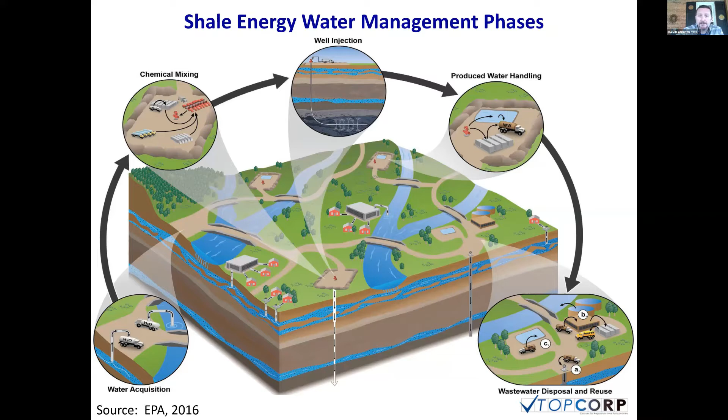This is another way of looking at the process as far as the water cycle goes. You bring in water, blend it with chemicals, inject it into the hydrocarbon-bearing formation, the shale, and then you get some percentage of the fluids you originally injected back. Initially we consider that to be flowback. Then as time goes on and the well is actually commercially producing oil, gas, or natural gas liquids, you get produced fluids along with it. It's really about how we manage those fluids in an environmentally sustainable manner that's also cost effective for the industry. So we'll explore some of those options.

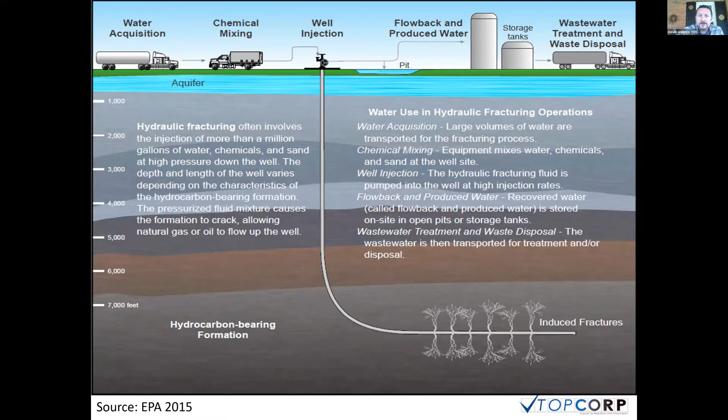So what are flowback versus produced fluids? I just kind of touched on that.

When we're fracturing a well, we know this is a fairly water intensive practice. Let's say we're going to use 10 million gallons of fracturing fluid to fracture a well with a lateral length of 5,000 feet. So we're injecting about 2 million gallons for every 1,000 feet, or about 2,000 gallons per foot on average into the shale.

As you inject those fluids during the fracturing process, which may take the course of a week or so, once you're completed with fracturing you begin to flow back the well, and a portion of those injected fluids return back. That volume varies. Here in the Marcellus in Pennsylvania, we'll typically get between 5 to 10% of the fluids we injected back out of the well initially.

As you begin to produce economic volumes of hydrocarbons, you continue to get fluids returning up the wellbore, collectively known as produced fluids. Sometimes those terms get used interchangeably, but some people do use a distinction: flowback is that initial surge of fluids before the well's actually producing, and produced fluids are what return as the well is actively producing hydrocarbons.

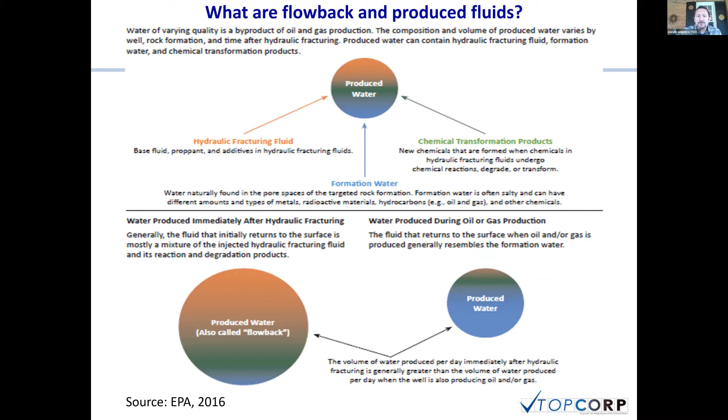This gives a sense of the relative costs of all the different phases. If we have a $10 million well, between the cost to drill it and fracture it, the completion fluids and the flowback—basically your water management—based on this study, is about 12%. So you could be looking at, on a $10 million well, in excess of $1 million in fluids management.

It's not an insignificant cost, so finding ways to do that as efficiently and cost effectively as possible will bring down the operational costs of developing shale energy. With the prices of oil and gas pretty depressed right now, any of those efficiencies are going to be important from an economic standpoint.

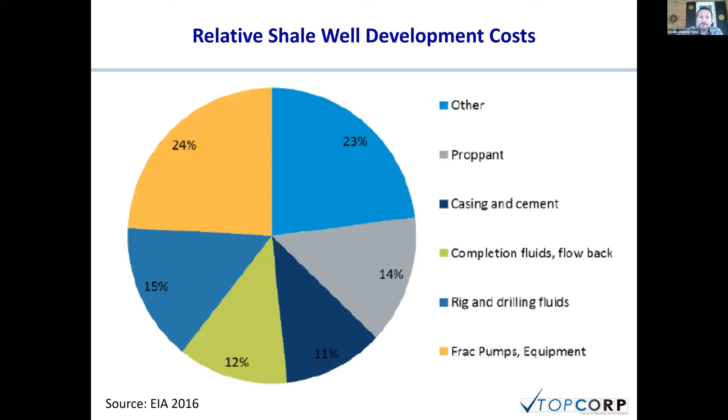We're talking to a pretty geographically dispersed audience here today, and different basins have different approaches. Here in the Marcellus, these numbers are a few years old, but a few years ago the average frac job was somewhere around 5 million gallons of fluids, most of which is surface water.

When you think about where the fluids are coming from overall, some might be groundwater—we do use some municipal sources that originate from groundwater. But we also recycle the flowback and produced fluids at a pretty high rate, and I'll get into the specifics on that a little bit later.

So you could have a variety of water sources here in Pennsylvania, but the majority of it's coming from surface water sources. Compare and contrast that to the Barnett Shale, where you're using a similar amount of water, but there's a lot more groundwater used in addition to the surface water, so that's about an even split, and then a little bit of recycling of flowback and produced fluids, but not so much.

So if we move to the other side of the equation here, in the Marcellus, the volume of return fluids is relatively low. We'll get maybe 5 to 10% of the fluids injected down into the shale back initially as flowback, and then we'll continue to return fluids over the course of the well's productive life. So over the course of, say, 10 years, we might get 30% or more of the fluids back, but the vast majority stay down in the shale, which is relatively dry and does have some absorptive capacity.

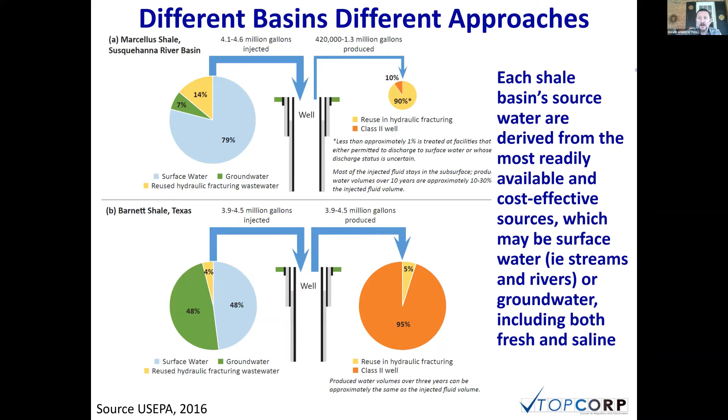So this is a slide that just kind of shows the relative gas production, and I apologize, these are kind of awkward units. We're looking at millions of cubic meters in gas production, oil production, and basically flowback and produced fluids. But the actual absolute numbers don't matter so much. What we're really interested in here is looking at the return fluids that you get back, and what that means for long-term management of those fluids.

So in this case, this goes up through 2016. In the Permian Basin, you get relatively low gas production, but you do get relatively high oil and liquids production. But then your return fluid volumes are relatively high, so you're getting a lot more return fluids per unit of hydrocarbon produced. Whereas, say, in the Marcellus, or even the Haynesville, some of these dry gas plays, you get pretty decent gas production, but not a lot of flowback or return fluids to manage.

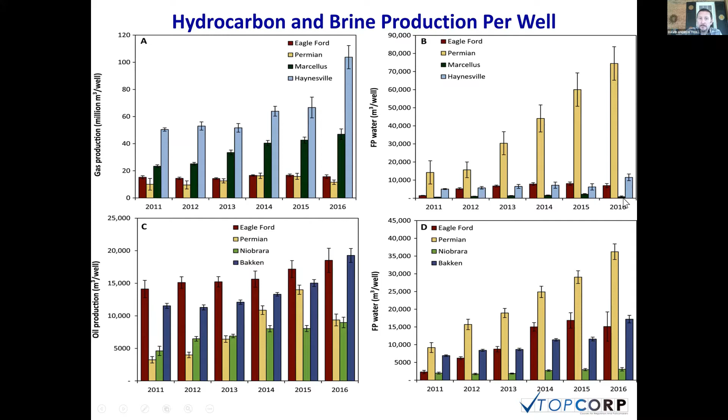This same study looks at it a little bit differently, looking at the ratio of your return fluids compared to your original water use. So for instance, if you're at 1 here, that means basically everything you're putting down the hole is coming back up. And if you're above 1, you're actually getting a surplus of fluids back, more than you actually put down there. So again, the Permian, based on this study, you can get on the order of 2, 3, 4 times more fluids than you injected down there in the first place. But say in the Marcellus, you're getting more like, as we said earlier, 20, 30, maybe 40% of the fluids over the life of a well.

So that was more on the gas side of it up in the upper chart, and down here in the bottom we're looking at the oil side of it, but basically the same trend there as well. So basically your water-wet shales tend to produce more flowback and produced fluids—they just don't have as much absorptive capacity. The hydrocarbons kind of repel the water back out, whereas the dry gas plays can absorb more of that water and actually draw it in with capillary forces.

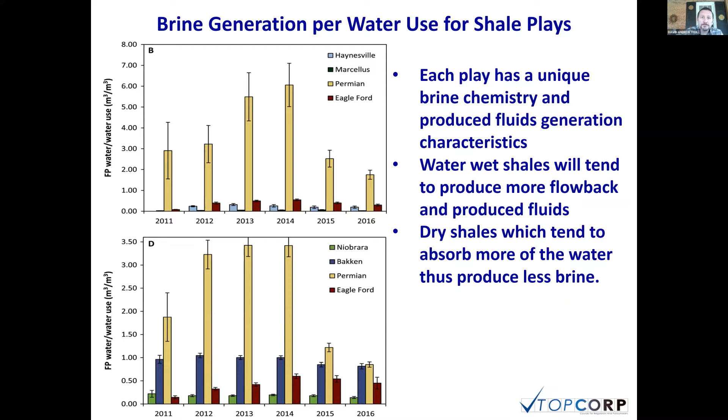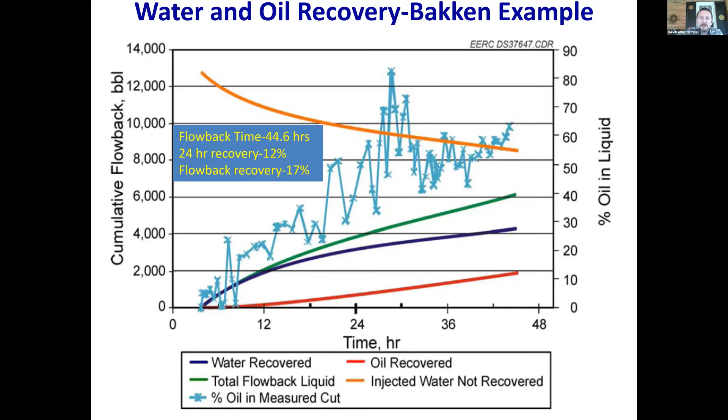So just an example of water and oil recovery from the Bakken. You've got cumulative flowback here on the left y-axis, and the percent oil cut, showing how much is oil versus water or brine. Over the course of time, you're getting a higher oil cut, going from 0 to somewhere between 60 and 70% oil in the liquid over just a couple days after flowback. When you think about how much fluid you injected versus how much you get back, in the first 24 hours you get about 12%. Overall during this 2-day period, they got about 17% of the fluids injected back as flowback, just to give you a relative sense of the volumes involved.

When we think about the quality of the flowback and produced fluids, this is an example across many of the western basins, both conventional and unconventional formations. Even from play to play or formation to formation, you can have quite a bit of variation in total dissolved solids, or TDS concentration. So if we look at the Williston Basin, you may see anywhere from 1,000 milligrams per liter to 300,000 plus milligrams per liter of TDS in the produced fluid.

Generally speaking, your early time flowback TDS concentrations are going to be low. The fluids have not been in the formation very long, so they don't have a chance to dissolve out salts and other metals down there. But over the course of time, as you get more water or fluid rock interaction, you're going to dissolve out more of the dissolved solids, and they'll come back up as produced fluid. So generally your TDS levels increase over time until they reach some sort of equilibrium.

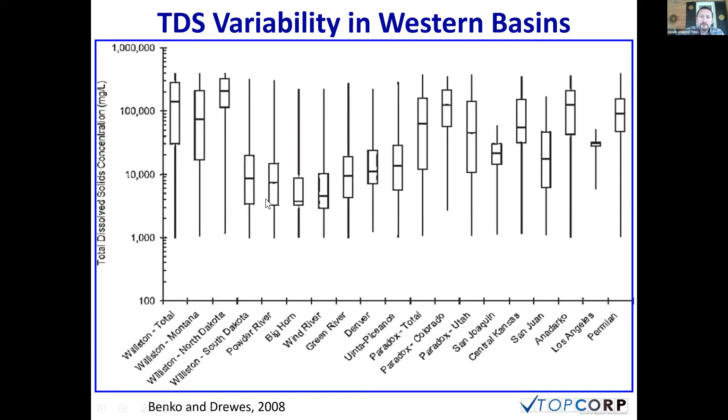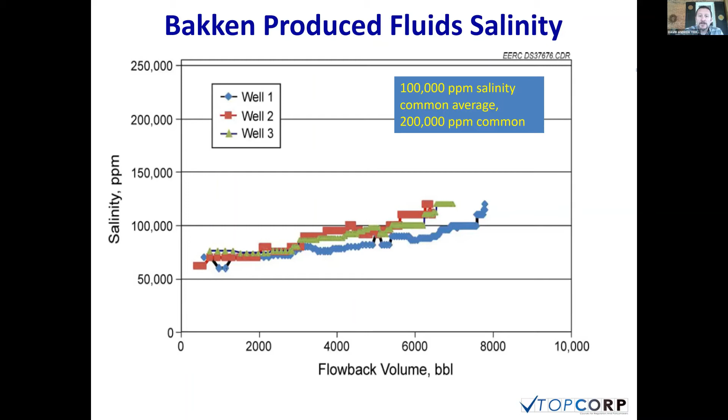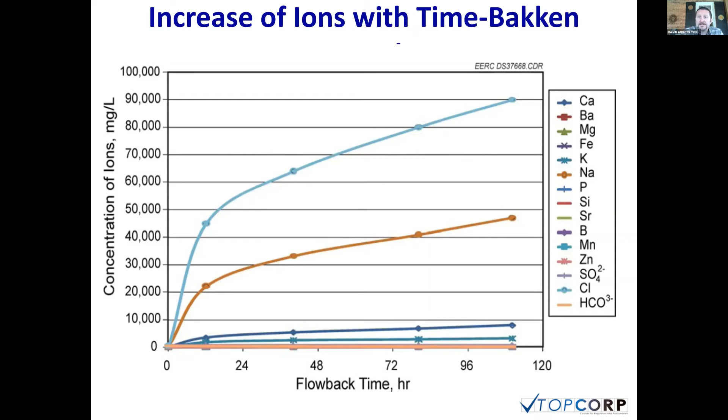This breaks out the various ions that cause the high TDS, again still looking at the Bakken here. Generally, chlorides drive the TDS levels, along with sodium. You may also have calcium, magnesium, iron, and some other ions, but typically the salts, sodium chloride, calcium chloride, are what's going to drive your TDS with development of these shale formations.

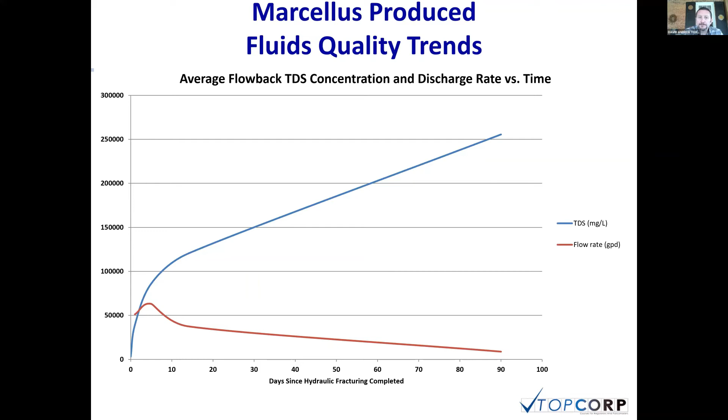So how you manage those fluids may actually change over time. Some companies may choose to recycle the early returning fluids because that works better with the frac fluid chemistry, but then dispose of the higher salinity fluids to minimize any interference with the chemistry of the return fluids. That covers the chemistry side of it, and based on the chemistry you're experiencing with your flowback or produced fluids, that may dictate how you end up managing those fluids.

I come at this having worked in the Appalachian Basin, especially in Pennsylvania, where the industry does recycle the vast majority of the flowback and produced fluids, whereas in many of the other plays, these fluids are primarily disposed of via disposal wells with very little reuse.

But the four basic options out there would be to directly use flowback or produced fluids to fracture another well. This is fairly efficient in that you really don't have any treatment costs, but you may have increased potential for downhole issues such as plugging, for instance.

That would depend on the chemistry of both the shale and the fluids that you're sending back down there, so that's something the industry needs to consider. You may have on-site or field treatment and reuse, so you do have some level of treatment in the field, which minimizes any downhole scaling issues, but you're going to have some cost associated with that.

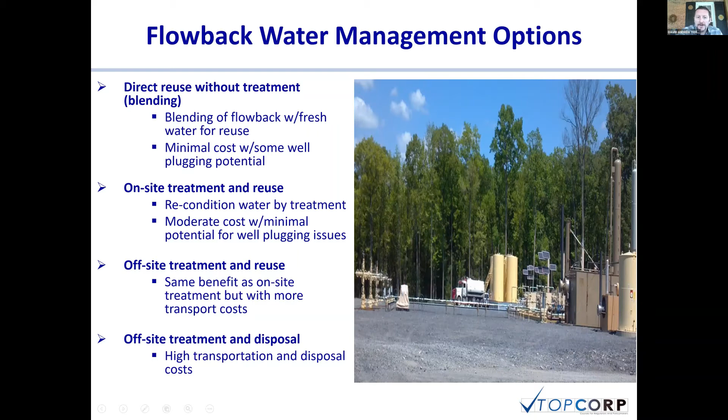So depending on your strategy, if you are going to treat for recycling, there would be some considerations there based on what kind of treatment technology you're looking at. You'd want to have a technology that has a high recovery of the fluids, so you're minimizing your waste volume and the associated disposal. It removes the contaminants that you're concerned about, whether that's chlorides, for instance, or maybe it's total suspended solids.

That's something I should mention: we've seen a complete evolution of how the industry manages fluids here in the Marcellus. When the Marcellus originally was being developed in the mid-2000s and even up through the early 2010s, a lot of companies were using primarily fresh water, and it wasn't until around 2010 that companies started to see that recycling could be done at lower cost and not affect well production. So then you started to see a lot more recycling of these produced fluids occurring.

But on the treatment side of things, you don't see a lot of advanced treatment. Really, the industry's kind of focused on removing total suspended solids to minimize the physical plugging of any fractures, versus trying to remove dissolved constituents like chlorides, calcium, magnesium, barium, or strontium, which are common potential scalants out in the field.

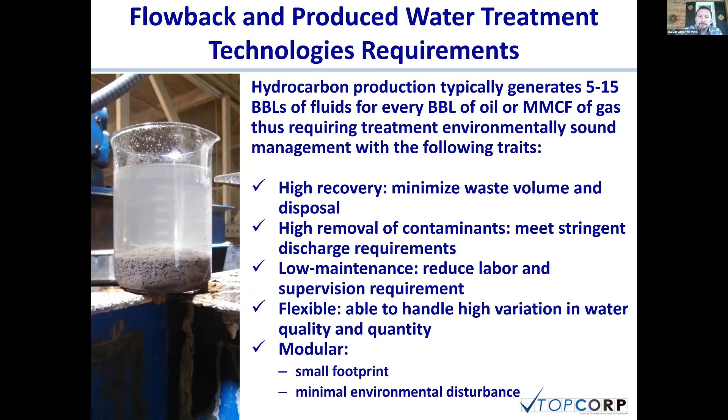When we do think about recycling of the fluids, there are a lot of tools in the toolbox, though they're not all being used nowadays. We do see a lot of filter socks out there in a lot of the plays to cost-effectively remove total suspended solids. We did have quite a bit of chemical precipitation technologies out there to remove potential scalants out of the fluids for recycling. You did see, on some level, electrocoagulation used to also remove scalants, but not nearly as much as chemical precipitation.

And then on the advanced treatment side of things, if you want to remove things like salts, you're going to have to start looking at some sort of evaporative technology to basically create a distillate that separates the dissolved salts from the water. Reverse osmosis generally can't handle more than, say, 40,000 milligrams per liter of total dissolved solids, so it doesn't really work in too many of the shale plays. And that's again where the evaporative or thermal technologies come into play.

You could potentially use filtration, but again, it doesn't get a lot of attention out there, and it has an upper limit on the TDS it can handle. Oxidation is listed here too; again, that's really not going to remove anything, but it helps balance out the chemistry a little bit. And when we think about relative costs, something simple like a filter sock might be less than $2, maybe even less than a dollar per barrel. But some of the advanced treatment technologies could be in excess of $10 per barrel, which might not be economic for a lot of companies out there.

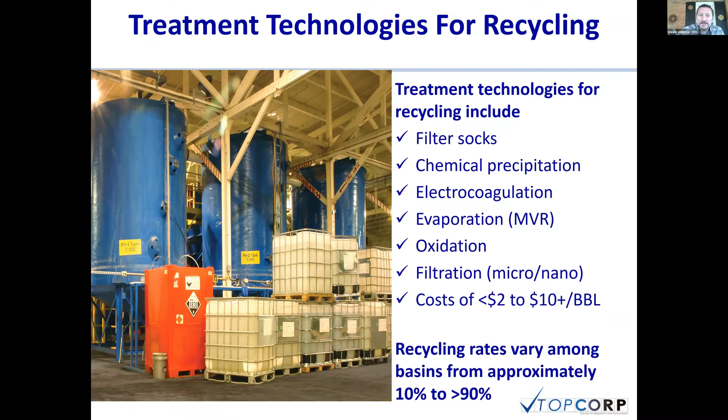To treat these fluids for recycling, every company, or every reservoir engineer, may have a different philosophy on what they feel the formation can handle without having adverse impacts to production. So generally we see the total dissolved solids be something less than...

50,000 parts per million. And there's a whole host of other parameters of interest, based on an industry-wide survey. Things like hardness, barium, strontium, iron, manganese, calcium, magnesium, sulfates, total suspended solids. You can see the desired treatment levels there.

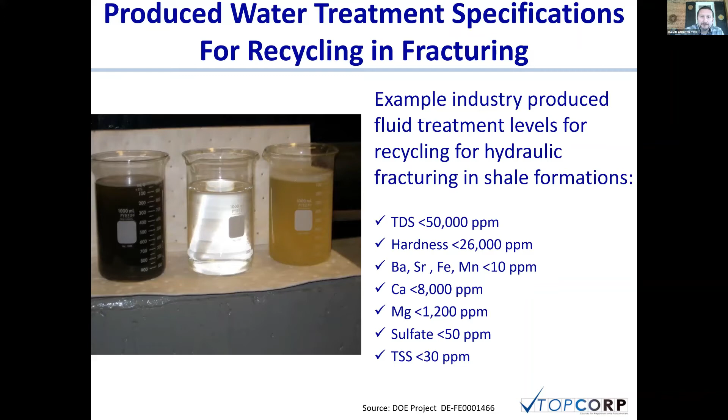When sending these fluids back downhole during recycling of flowback, I kind of covered a couple of the scalant removal technologies. We talked about chemical precipitation, which is very effective. It's a very conventional technology that's been around for a long time.

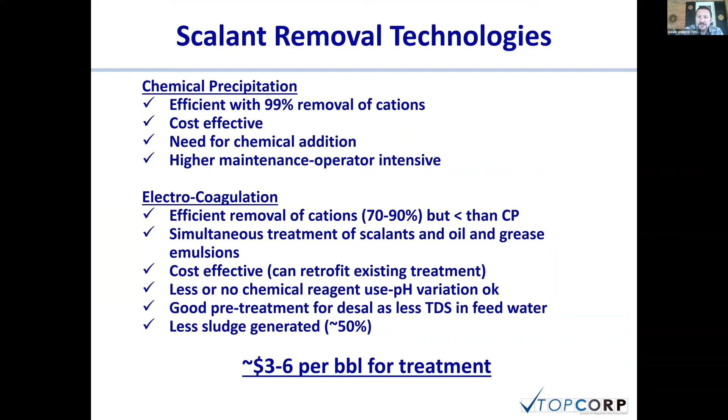Electrocoagulation's been around. It's not quite as efficient at removing some of the scalants, but it does lend itself maybe to being used in the field a little bit more. It's not a super common technology out there and can be kind of finicky.

But when we think about a scalant removal treatment scheme and the treatment process, you're going to bring the fluids in. Often they'll run through a sedimentation tank to drop out the heavier fraction of any of the solids in there. You may add in a coagulant, allow that to take effect and flocculate out your scalants, run through a clarifier.

And then ultimately you're going to end up with quite a bit of sludge, wastewater treatment sludge that typically needs to go to a landfill. So now you've created a solid waste management issue that you need to deal with.

And depending on the nature of the radionuclide concentrations in your flowback and produced fluids, you can have quite a bit of naturally occurring radioactive material in here, which some landfills may not be willing to accept. So you have to tailor your water management scheme to not just the physics of it, but also the regulatory framework within which an operator is operating.

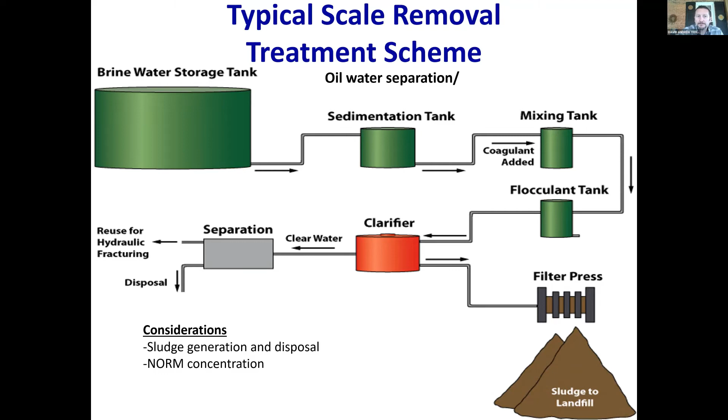I already kind of talked about the desal technologies out there. We do see thermal distillation, such as mechanical vapor recompression, used pretty commonly. It's fairly energy efficient. The membrane systems, as I mentioned, aren't very useful in many of the shale plays because the TDS of the flowback and produced fluids is too high.

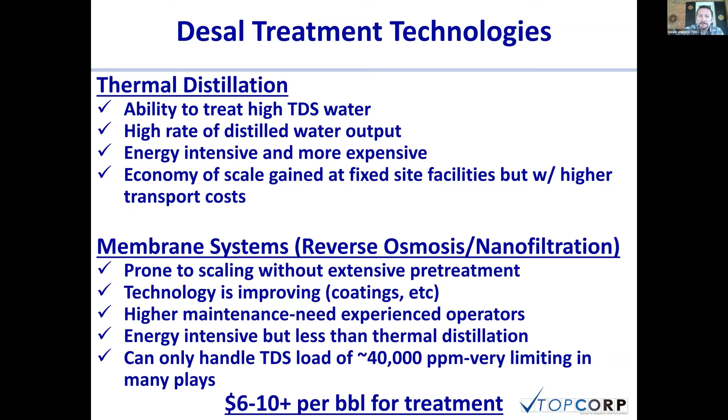Where you do have higher TDS flowback and produced fluids, you're starting to get into evaporative technologies or even potentially crystallizers. Perhaps membrane distillation - I'm not an expert in that, but as I understand it's a fairly expensive operation. So beyond evaporators and maybe crystallizers, you really don't see a whole lot of other high TDS treatment technologies being used out there.

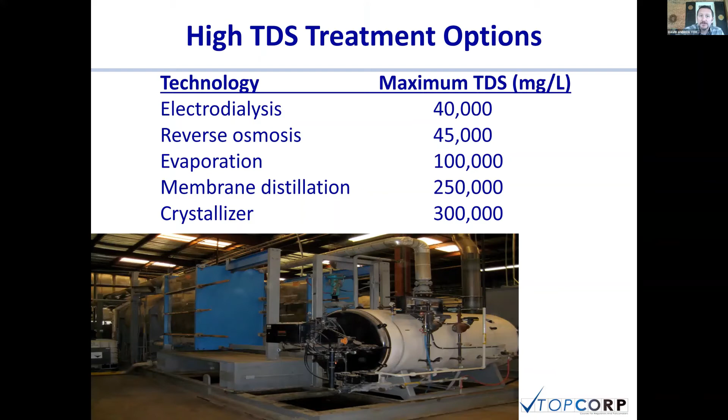We do see quite a few field treatment technologies out there, basically scaling the technology down. It can be brought in on a trailer and taken out into the field. And what that does is it minimizes your trucking costs, which can be quite significant, along with any of the hazards, roadway hazards with trucking those fluids.

So it ends up that field treatment can be cost effective, especially as technologies and efficiencies improve. Of the fluids that are recycled here in the Marcellus in Pennsylvania, about two-thirds of that recycling occurs in the field. So there's quite a lot of capacity in centralized treatment plants, but the fluids just aren't making it there because it's generally more cost effective to manage them out in the field.

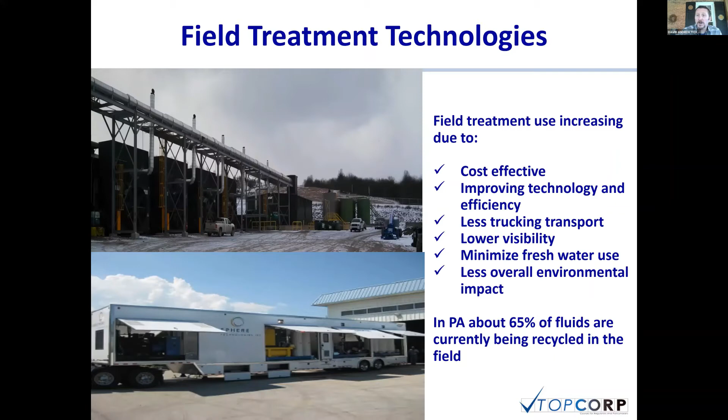Just to give you a sense of some emerging technologies out there that could be used: forced crystallization, using waste heat from compressor stations, for instance. We have at least one operator who's been using the waste heat coming off of compressors to, in essence, distill the waters so that they can recycle. So it's basically a free heat source, which greatly reduces the cost there. There are some innovative things that companies may be able to do internally.

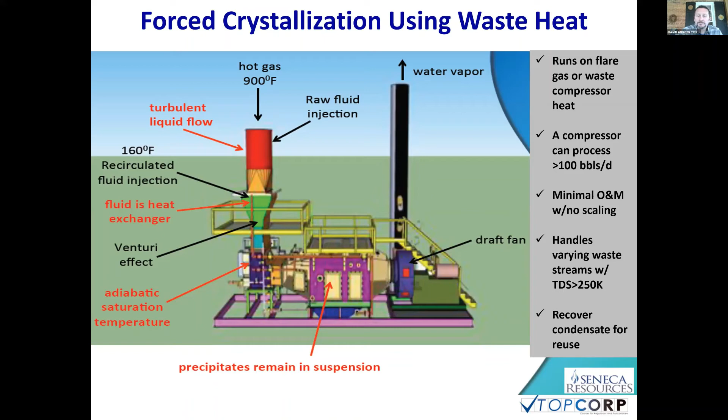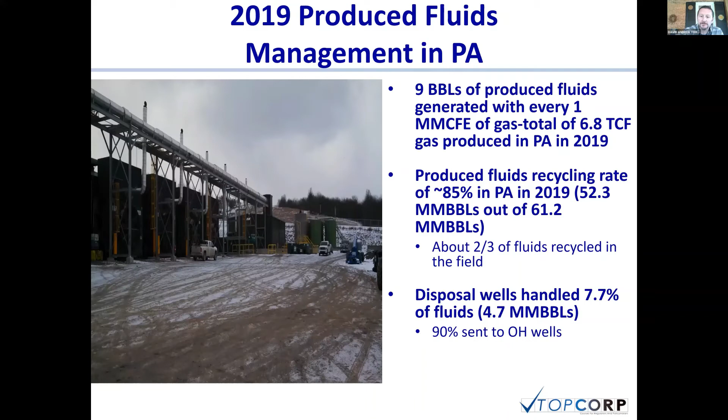We don't have many disposal wells in Pennsylvania, so a lot of the fluids are sent to disposal wells in Ohio, to the tune of 90% of the 4.7 million barrels of fluids generated went to disposal wells in Ohio. So there's a lot of trucking associated with that at significant cost, depending on where in Pennsylvania you are with respect to where the disposal wells in Ohio are. You may be looking at in excess of $15 per barrel to haul fluids to Ohio's disposal wells. So it gets pretty expensive. You can start to see why in Pennsylvania, recycling is a much more common practice than many other shale plays in the U.S.

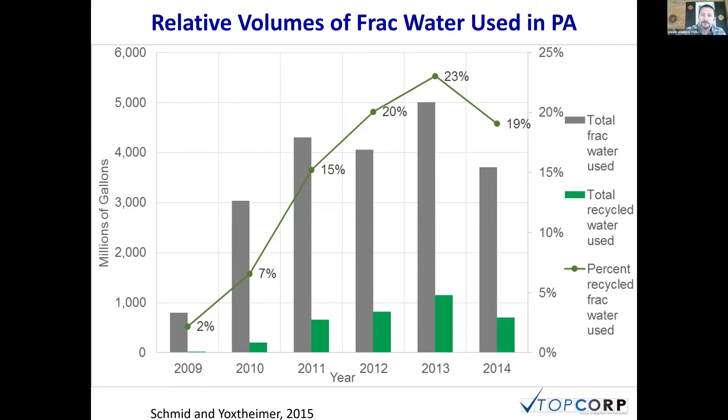When we think about brine disposal well siting, I know you can go down to Texas, and there's an excess of 8,000 disposal wells, and if you go up to the Bakken in North Dakota, there's on the order of 400 disposal wells. So there's a lot of disposal infrastructure already in place.

But when you go to site a new disposal well, or retrofit an existing, say, depleted gas well into a disposal well, you need to look at both geologic characteristics and surface land use. Ideally, a disposal well would be sited away from population centers. Here in Pennsylvania, these have become a very hot topic, highly debated, with lots of public opposition. Nobody wants a disposal well near where they live. They don't want to see the trucks coming through their town. So this has really set up a legal battleground for disposal wells. But if you can find the right surface location away from population centers, so as to minimize that disturbance, in combination with the right geologic setting where you have sufficient permeability in the injection reservoir, as well as confining layers to prevent any unwanted migration of fluids upward, as well as a lack of faulting, so as to minimize any induced seismicity issues - those are the kinds of geologic characteristics you'll need to take into consideration.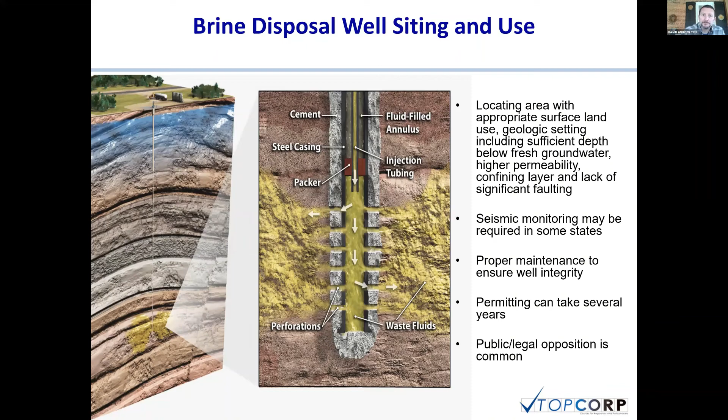When we think about injection well capacity, again, we have lots of conventional wells here in Pennsylvania. Many of them have been drilled into the Oriskany Sandstone, which is a fairly common injection reservoir for disposal wells. So you need to look at just what volume of fluids can I inject down in there and at what pressures. If you just look at the porosity of the bedrock, basically the primary porosity between the sand grains, in addition to any fracture porosity.

This is just an example. But if you had a well that was drilled into a zone that had an effective porosity of 4%, a 50-foot thick pay zone, and the drainage area for that field assumed to be 40 acres, then a typical injection well in this particular sandstone could ultimately accommodate about 620,000 barrels or about 26 million gallons before just filling the primary porosity down there. So this just kind of gives you a sense of what volume of fluid you could inject just to fill the porosity up.

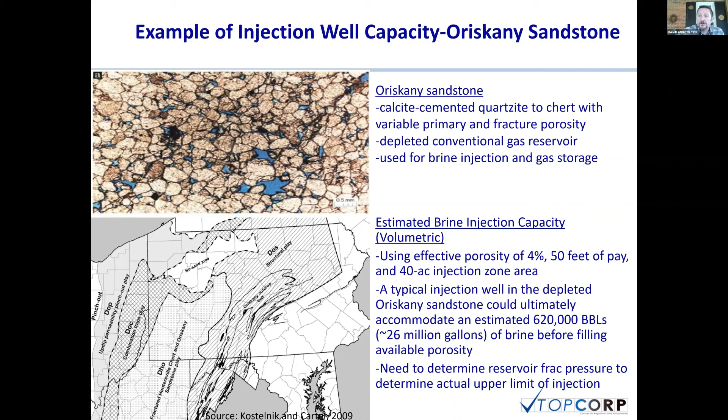Basically, the gist of this plot is to show how the pressure builds up down in the formation over the course of time. It builds up rapidly in the first several years and starts to kind of plateau out over time. You can read the assumptions - these are all the parameters you need to consider. You can plug it into this equation, and that'll give you a sense of the pressure, so you can model this in advance.

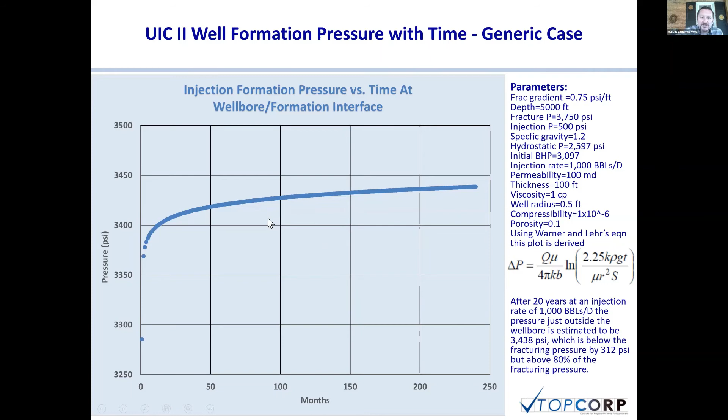But if you're injecting 1,000 barrels per day for 20 years, your pressure is going to be around 3,400 PSI, which is below the fracturing pressure but above 80% of the fracturing pressure. So you'd already be too high in this particular case - you would have had to have stopped injection previously.

All right, I know we covered a lot of territory there, but that was sort of the soup to nuts on produced fluids management. Really what you're looking at is needing to have environmentally sound, cost-effective fluids management solutions. Recycling, which does not occur at significant levels in many shale plays, can actually be very cost-effective with some of the environmental benefits we discussed: less fresh water, less need for disposal, and the associated issues there. There's a whole host of treatment technologies out there - finding the right fit for your application is what you're going to need to do.

Ultimately, these plays are long-term plays, so you really need to be looking at long-term strategies. Here in Pennsylvania, we're reaching a point where we're producing nearly 7 trillion cubic feet of gas per year, generating 60+ million barrels of fluids per year.

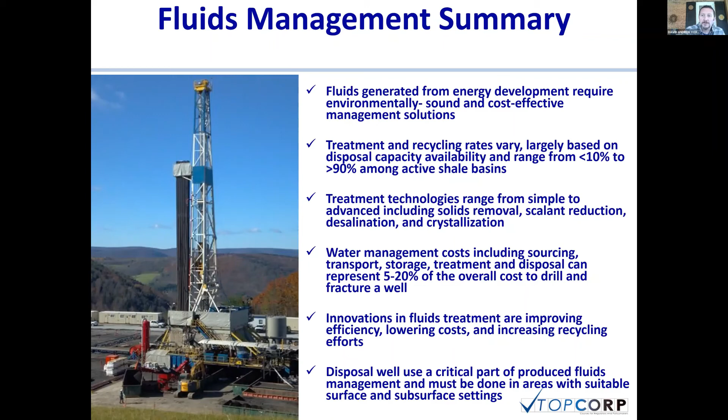And that's great when we can recycle 85% of those fluids. But now as activity starts to drop off, there's not as much fracturing, so suddenly you don't have as much of a window to recycle those fluids. So treatment schemes that allow disposal, or disposal wells themselves, are going to need to become a much more significant part of our fluids management portfolio in our part of the world, and in others as well. So with that, if there's any questions, I'd be happy to address them.